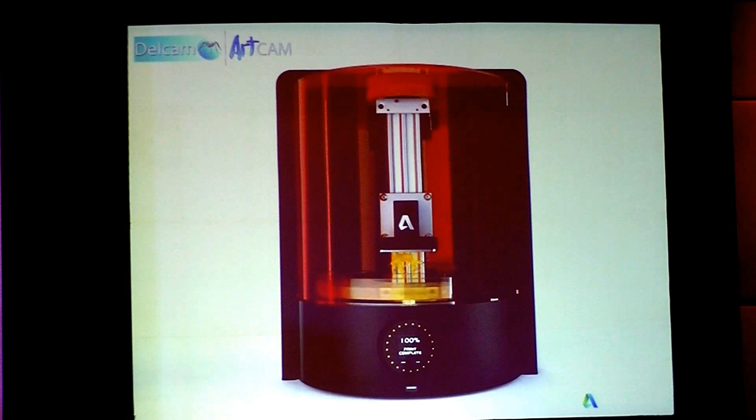With Jewelsmith, you can create your ring design, you can nest it into 10 or 20 or any amount of parts you like onto the same physical model. And then with the Ember 3D printer, you can print these extremely quickly. So it allows you to print up to 10 rings nested on the same block in 60 minutes, or up to 20 rings in up to 90 minutes. So it is really impressive to see. So coupled with the time and efficiency, it's a perfect match for using with ArtCAM Jewelsmith.

So I've discussed the products. Now I just want to show you what type of things ArtCAM is used for. Because talking about software, you can't really imagine what it might be used for. So we have a huge range of industries that use it.

First of all, I assume everyone in here has a phone either in their hand or in their pocket. The back of the phone might have a custom cover, help you grip it more, it might just be a nice design. So phone manufacturers utilize ArtCAM software to create embosses on the covers. Also, they use it for their signage in their outlets as well.

We can also make chocolate with ArtCAM. So we have printed molds using the design of the chocolate. These are then machined, chocolate's molded, and you get something nice to eat at the end of the day.

Car manufacturers use ArtCAM. They need some way to imprint their designs for their badges into the mold part, and they use ArtCAM to realize this. So they bring in their 2D design, they create a 3D relief, and then they manufacture it for that. Again, I mentioned specialized jewellery outfits. So again, incredibly intricate jewellery designs can be realized through the Jewelsmith platform.

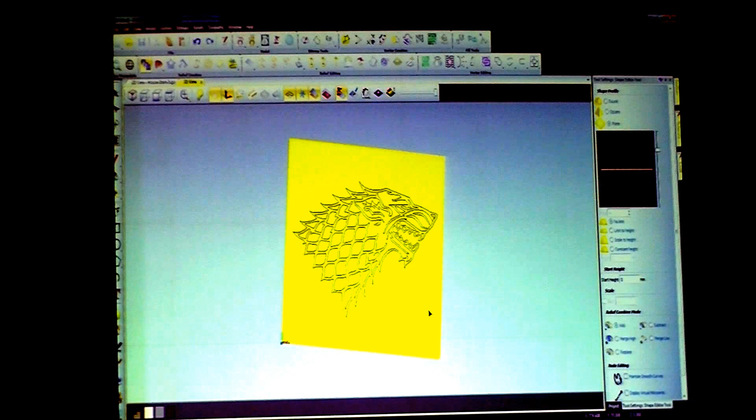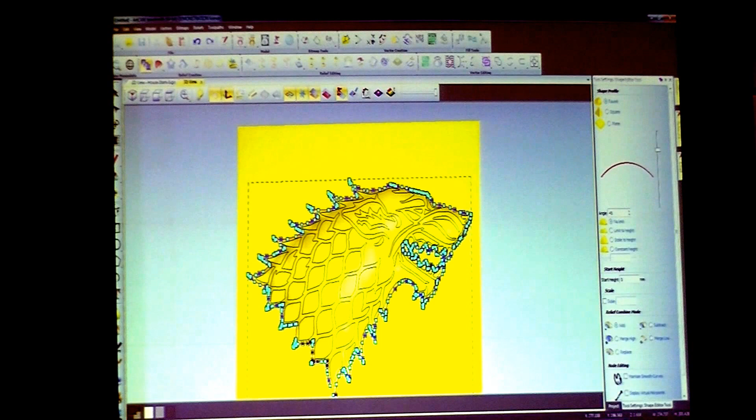Okay, so I have my vectors. I can now work towards creating a 3D profile. So I turn to my 3D view, and you can see my model representation as a plane, and then my vectors are sitting on top of that. So first of all, I'm just going to create a primary relief. So I do this by selecting one vector, the outline vector, and then I'm going to create a round relief. So you can see, once I click round, if I turn off my vector view and rotate the model, you can see the relief added to that single vector.

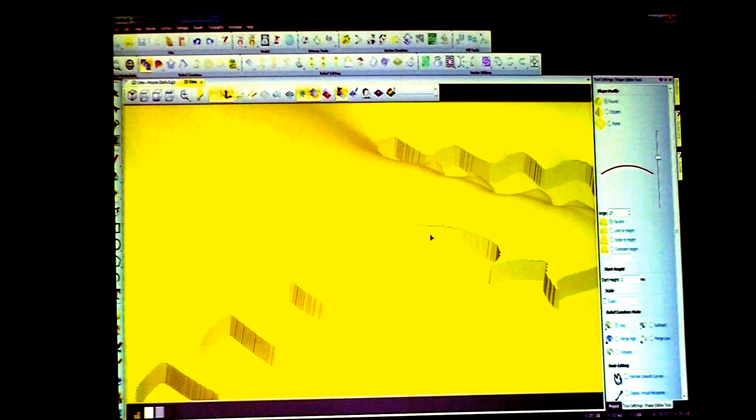So I can control it, even using a slider, I'll just set the height, so it's at an angle of 27 degrees. I'm good with that. Before I apply it, I'm just going to add in the starting height. So the relief is going to be slightly stepped above the starting plane. So just add in a value of 3 millimeters, and then you can see a start height added to the bottom. So I'm just going to apply that now. Close the form. I'm going to draw my vectors again.

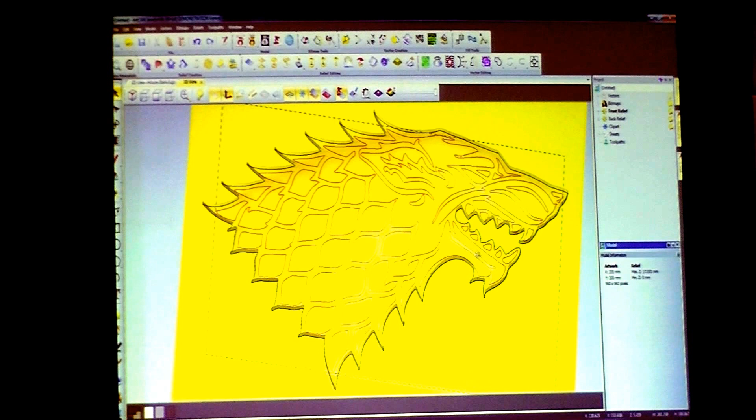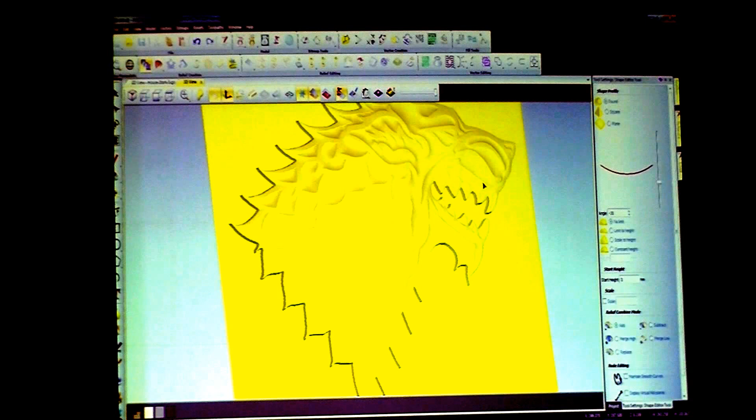This time I'm going to select all of them, and I'm going to apply a secondary relief to the remaining vectors. So if I open up my shape editing tool, again I'm going to use a round relief, except this time I'm going to create a negative relief. So if I move the slider again to something like -30, if I just turn off my vectors, you can see this relief instantly updating in my graphics window, so I can see exactly what is happening. And this secondary relief has been added on to my primary relief. So I'm building up the 3D model as I go along.

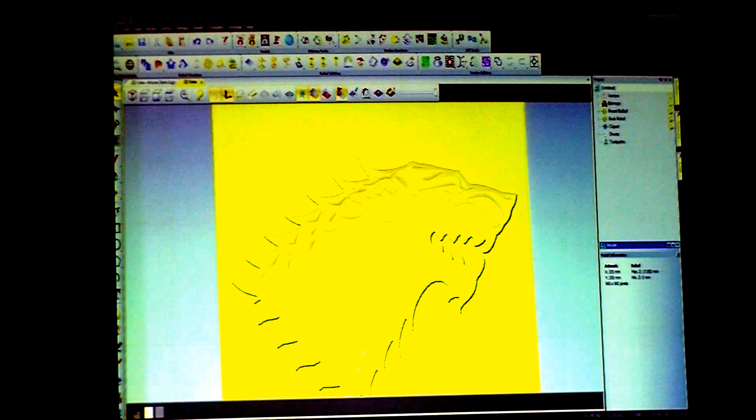So very quickly, I've just created quite a detailed 3D model based off of a single image. So I'm just going to apply that relief again. Close it. So my customer might be happy enough with this. I can see the outline of the wolf's head. I can see quite a lot of detail making it up, including the teeth. However, I'm going to add in a texture now. So if I open up the texture relief toolbar, I'm going to control the addition of texture based on my selected vectors.

And you can see I have a number of pre-built options. So I can add in a sphere. If I just click that, add it, you can see what happened to my model. So I get the spherical texturing added in between the vectors.

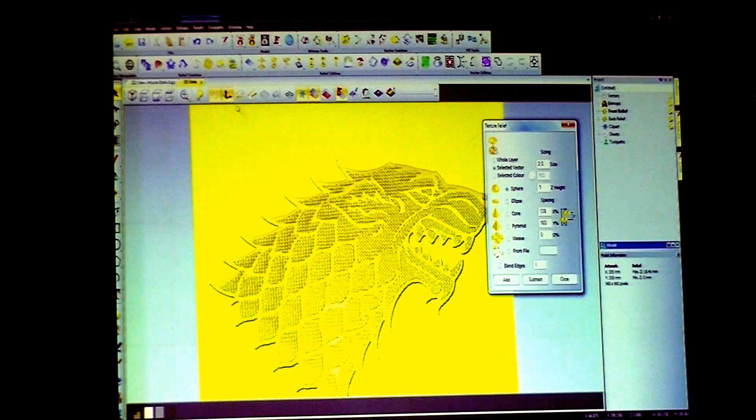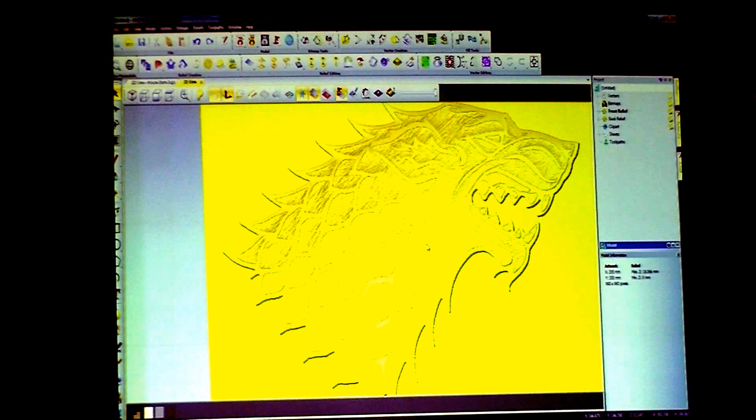However, what I am going to do is add a texture from a file. So I already have a file called wolf fur, which I've created outside of ArtCAM. So if I import that, it doesn't have a great resolution at the moment, so I'm just going to reduce the size to 200 millimeters. And then once I add that to my vectors, you can see it's instantly added on top of my reliefs in between the vectors that I wanted.

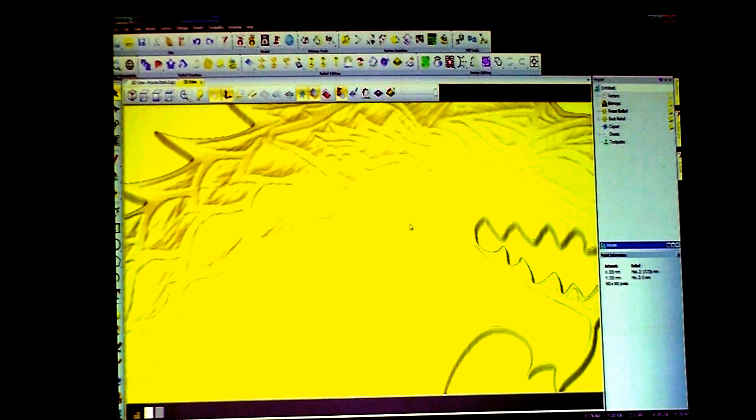So you can see I now have a very highly detailed model of the wolf's head. And just to clean it up before I move on to machining, I'm just going to smooth out the relief. So you can see here I have a number of smoothing passes. If I just change that to 2 and apply my fur and my total relief model, I smooth it out. So you can see the edges now have slight contours on them, and the fur has been smoothed as well. So I'm happy with my 3D model.

I'm going to move on to adding tool paths. So I have tool paths options here. If I move down to 3D tool paths, I'm just going to create a basic machine relief tool path. So you can see here I have the option to add in finishing options and roughing options. If I just focus on finishing, I'm just going to select a 6mm ball nose tool.

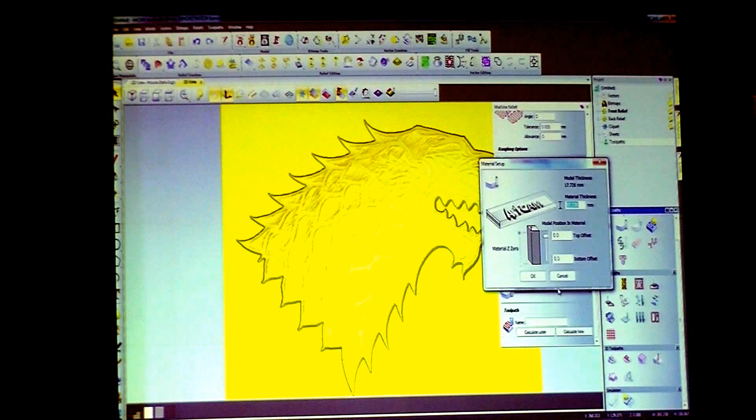I have a number of choices of how I want to machine this. So I can use several raster choices, I can spiral, and then I can use several offset options as well. I'm just going to leave it on a typical raster. And then just before I apply the tool path, I am going to define my material. So the height of my relief is 17.726 millimeters, but I know I'm going to be machining from a block of material 20 millimeters in height.

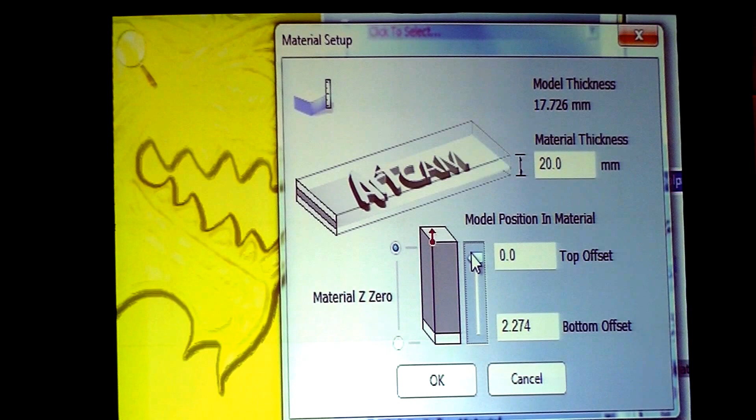So once I enter that value, I then have to choose where my relief model sits in that block. So I have a slider here, and I'm just going to move it to the top. So this means I'm still going to have a base where my model is going to sit on. So I'm essentially creating a plaque with the wolf's head. So if I OK that, I then get a graphical representation of my material block, and then I can just quickly calculate that.

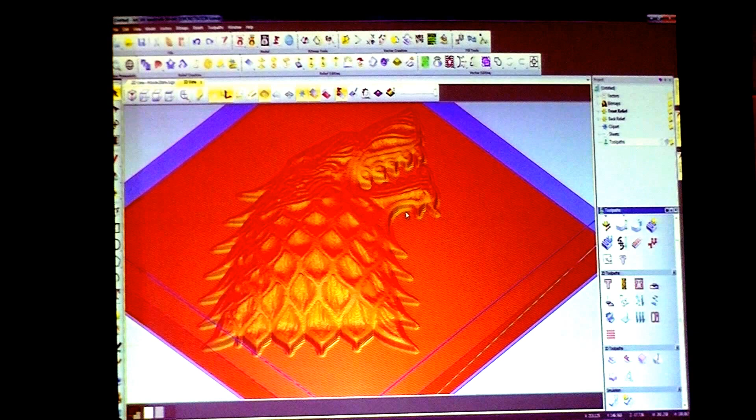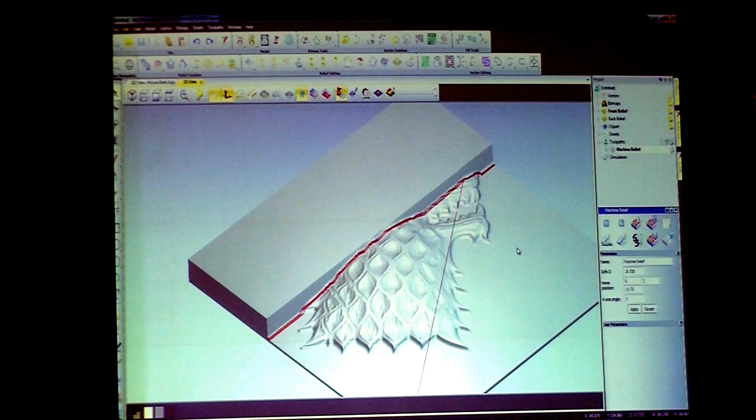So in a matter of seconds, I now have a fully machinable model using raster machining. If I zoom right in, you can see the raster lines moving over the model. Just as in any other CAM software, I can simulate that toolpath. So if I just simulate it like so, you can see the raster toolpath moving over the model and a representation of the material being removed. So this is what I have left. And that is what is going to be output if I put it onto the machine.

So very finally, I have one last step, and that is to just save the toolpath as a tape file. So I'm converting my toolpath into the NC program for my machine. Okay, so I've saved that. That essentially does the post-processing for me. So if I just open up the folder containing that file, open it with Notepad, you can see very simple G code making up this tape file.

Okay, so in the summary of that demonstration, in a very short amount of time, I imported a bitmap image. It was just a simple JPEG. I reduced the colors, and then I created an outline vector based off of those colors. So basically 2 clicks, I moved from an image to a usable 2D drawing. I then utilized the outline of the drawing lines to create these 3D reliefs on the model. And with those reliefs, I was able to quickly and easily apply toolpaths and output that to the relevant NC program.